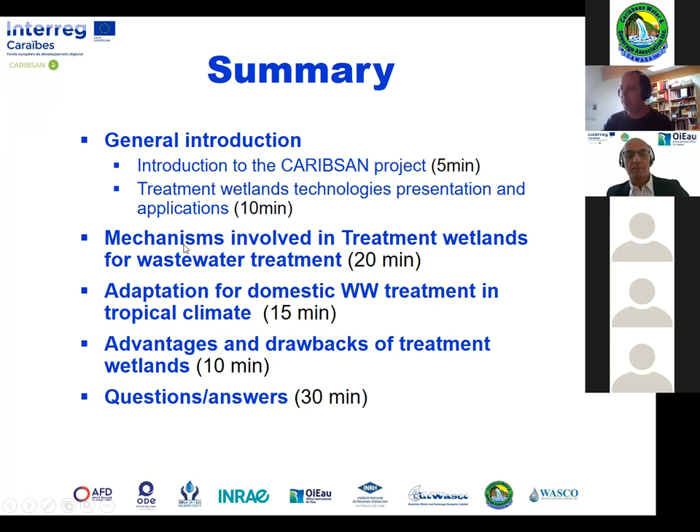We already had the introduction to the CARIBSAN project. The objectives of this webinar are to give you a general introduction to treatment wetlands, different kinds of technologies, and their applications. After, Joseph will present the main mechanisms involved in treatment wetlands. I will then come back on the adaptation of treatment wetlands for domestic wastewater in tropical climates, covering the big work we did in the French tropical islands. Joseph will finish with advantages and drawbacks of treatment wetlands, and we will have a 30-minute question session at the end.

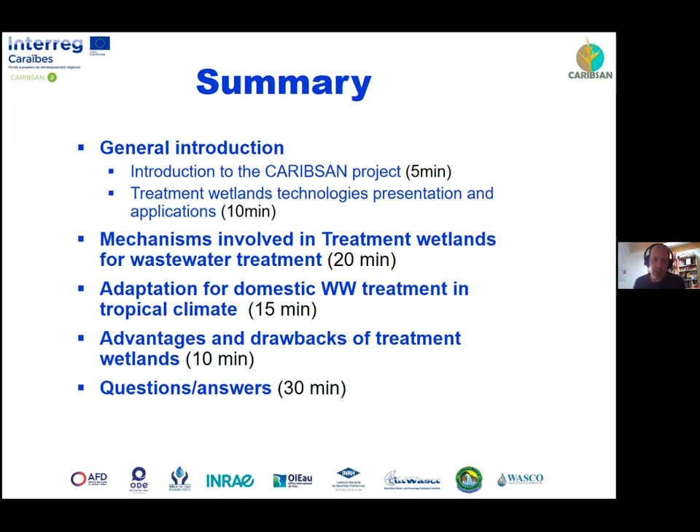So, general introduction about treatment wetland technologies. The first question is, what is a treatment wetland? It's an engineered wetland system, meaning it's not a natural wetland, which is designed to harness natural processes for the purpose of improving water quality. The key word in the sentence is improving water quality - there is an objective for treatment. It is technically and operationally simple, but it involves complex interactions between water, soil, plant, microorganisms, and the atmosphere.

During this webinar, we will not go too deep into the mechanisms involved, but if you are interested in the different kinds of applications, there is a free book available on the internet dedicated to treatment wetlands, with design examples and applications. Please feel free to download it and read the documents.

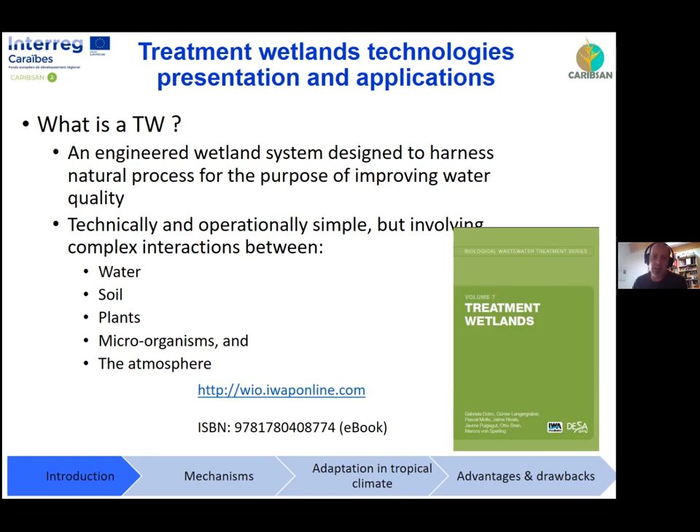Basically, when we are talking about treatment wetlands or constructed wetlands, that's the same term for the same technologies - we are focusing on treatment. We have two main technologies: what we call surface flow wetlands, which are basically pond systems with plants, and subsurface flow, where we use porous media in which the water will flow. That means there is no ponding water or flowing water on the surface - the water flows inside a porous media. We differentiate according to how the water goes through the system when we talk about subsurface flow wetlands.

Whether the water flows horizontally or vertically through the system, and according to the flow, we can have systems that are fully saturated or not, and flows that go downflow, upflow, or mixed - sometimes down, sometimes upflow. There is a lot of different kinds of implementation and design, and you can see at the bottom of the scheme there are many technologies. This was a first terminology made something like 10 years ago, and it has evolved a little bit.

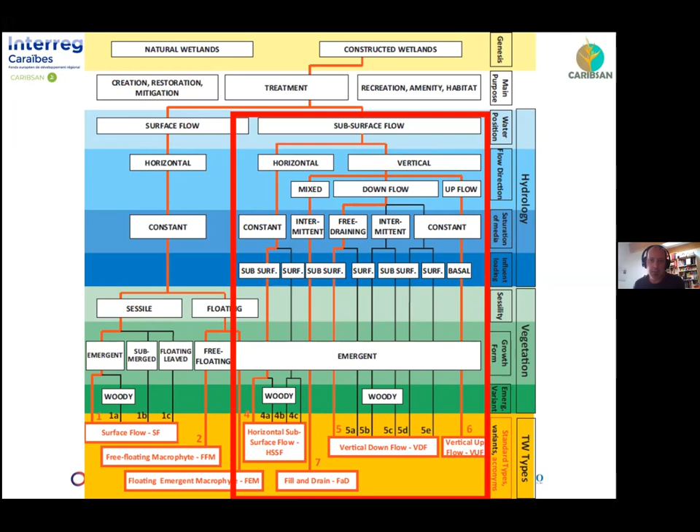Just to give you an idea about the number of treatment wetland systems that can exist - basically we have two. The main systems are horizontal flow, the one on the left, which is subsurface flow.

Yeah, there is no question. No, okay. So on the left - yeah, someone has his microphone on and I got some echoes. I don't know who it is. If you can, please, for the moment, put off your microphone.

Thank you. So on the left, you have what we call a subsurface flow treatment wetland, meaning there is a porous media in which the water flows horizontally within the system, and we saturate the system thanks to a pipe that allows us to adjust the level of water below the surface of the system. On the right, you have what we call a vertical flow system, which is fully drained at the bottom. When we apply water at the top of the system, the water flows vertically by gravity, and the system is not saturated.

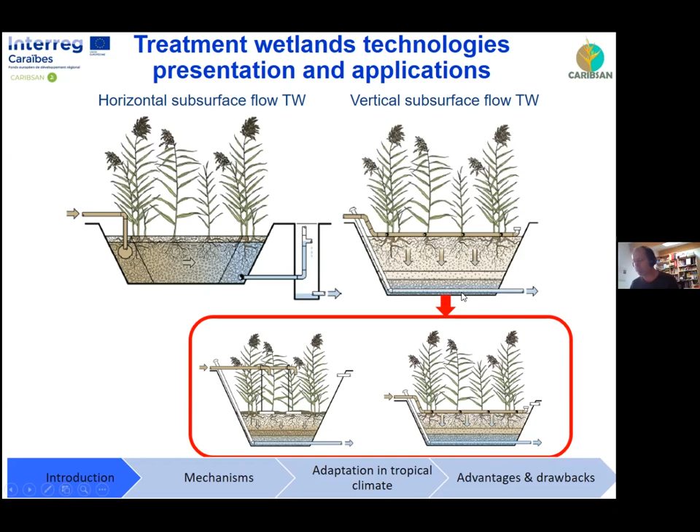For the vertical flow system, we can either apply raw wastewater without any pre-treatment, meaning treating the sludge and the water at the same time, or use vertical systems with different designs to treat pre-treated wastewater. There is also different evolution of the system, trying to mix both of the main configurations I just presented, horizontal flow and vertical flow.

Here you have a scheme of a vertical flow system, which is fed on top. The first part of the system is unsaturated, so we are promoting aerobic activity, and below there is a vertical flow saturated system. In this system, we try to implement two zones in which we will be able to develop different biological activity.

Another development that has been made over the past decade is trying to intensify the treatment wetland system a little bit. Here you can see two examples of vertical flow and horizontal flow systems, saturated with forced aeration. That means we mechanically blow air within the system to improve oxygen transfer.

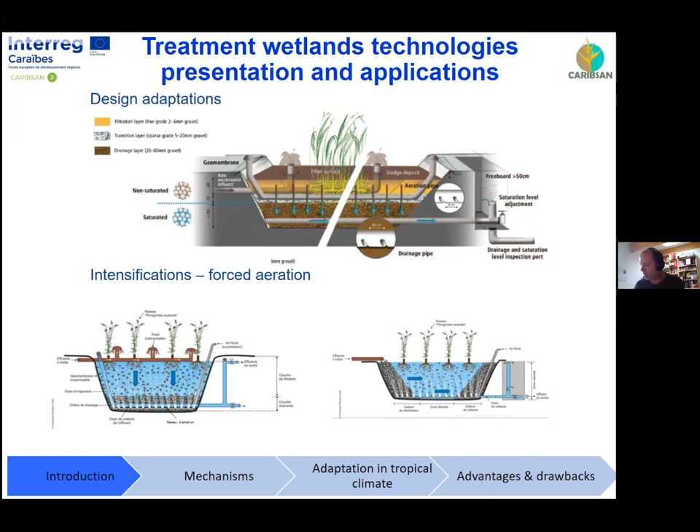Just a few rules to have in mind: when we want to design such a system, we need to adapt the surface and the media we use within the wetland system. For unsaturated systems, we use classical surface loads - that means how much water per square meter we can put per day, or how much pollutant per square meter we can put per day to reach a certain level of removal performance.

When we use saturated treatment wetlands, we use simplified models coming from chemical engineering to fit the retention time into the system. One thing we need to be aware of is to avoid any clogging of the media with time, and there are some rules we will discuss later to manage the clogging and ensure the system can operate over a long time perfectly.

The adaptation to climate is important as well, because biological activity will depend strongly on temperature. We have some rules to adapt the design of the systems according to climate. We will come back to this later.

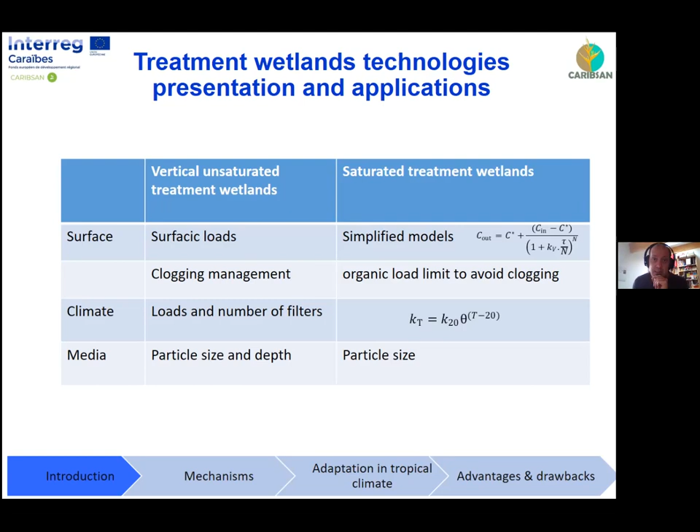This is just to give you an idea that the number of treatment chains we can build with wetland systems is huge. We have to adapt the design and which system we use according to the local context and the target for the outlet - that means which level of performance we want, for which application, whether we want to reuse the treated wastewater or just discharge into the water body.

We can also use recirculation between stages, or use specific materials as porous media to promote specific chemical reactions. So that was an overview of the treatment wetland family.

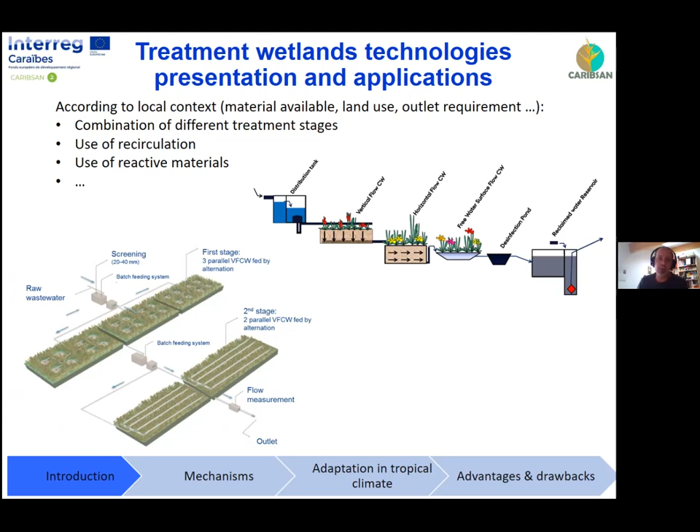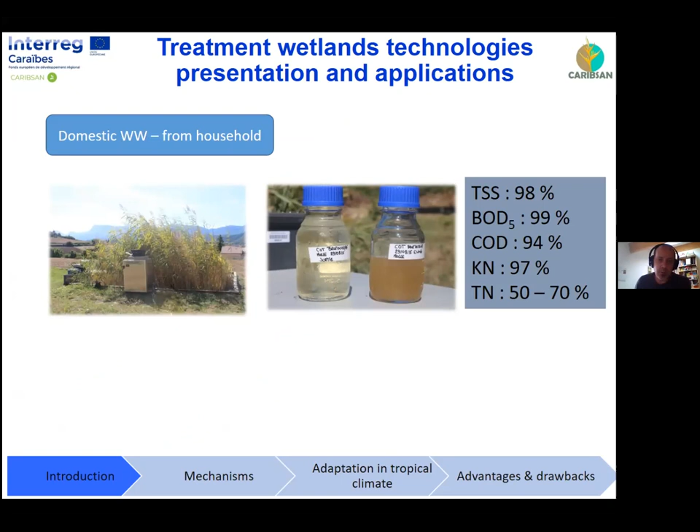I'd like to present some different kinds of applications now. What's interesting to us is the application for domestic wastewater - we can use such systems from household scale, meaning a treatment wetland in a house garden to treat wastewater from the house, but we can also use treatment wetlands for communities, up to big communities. The biggest treatment wetland in the world treating domestic wastewater from a community serves more than 25,000 people equivalent.

Another important thing is that you can adapt the shape of the design to try to reach an aesthetic aspect, as you can see here on the treatment wetlands in Thailand.

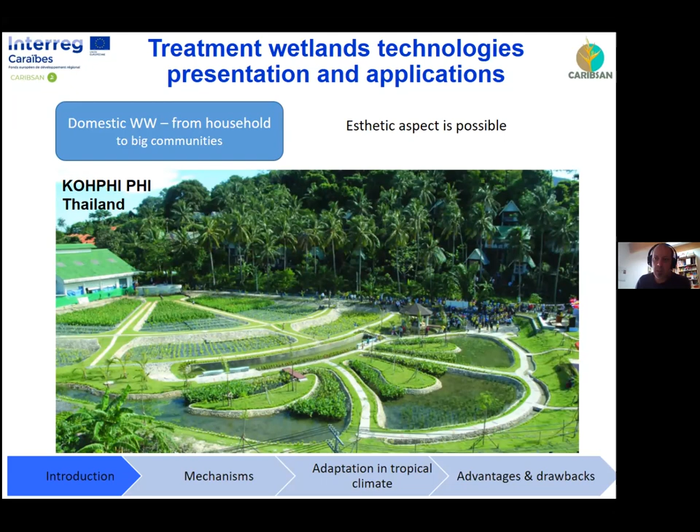Another possible application is to use treatment wetlands to treat sludge - that could be sludge from activated sludge. Here on the left you have a picture from a big activated sludge treatment system in Denmark, and in the background of the picture you can see the treatment wetlands designed to treat the exit sludge from the treatment plant.

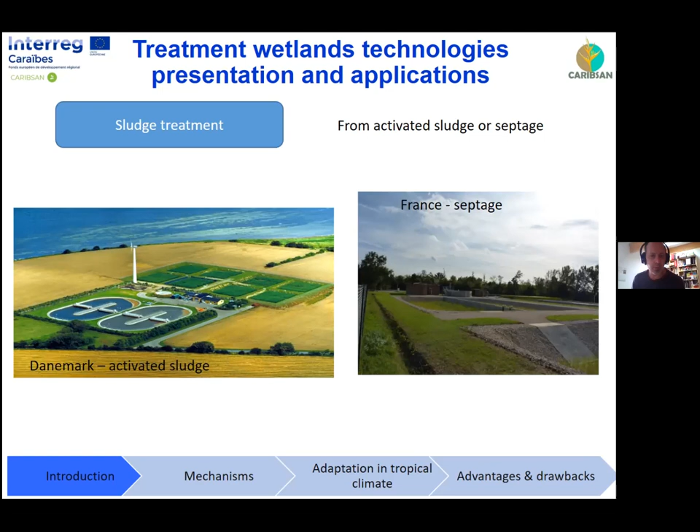You can also use treatment wetland to treat septage - when you have sludge coming from septic tanks, you can treat them on treatment wetland as well. The design and operation will be different than treating domestic wastewater, but you can achieve good performance. Here's a picture during construction, adapting the sludge treatment system for tropical climate - this was in Mayotte Island, for 5,000 PE.

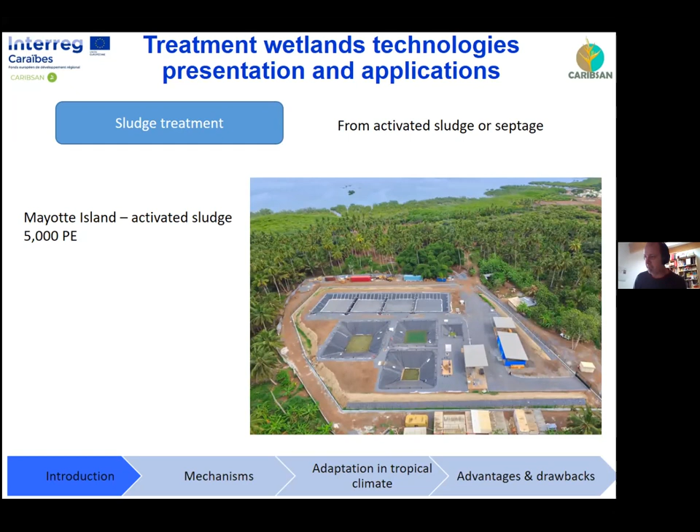Another possible application is to treat the overflow of combined sewers. During big events, you can have combined sewer overflow with a mix of rainwater and domestic wastewater that can impact the water body or environment, and you can treat this overflow locally with treatment wetland. Here's a picture of a system in France treating 1,500 cubic meters a day when it's overflowing. What's important is that we can ensure a specific outlet level in terms of pollutant concentrations.

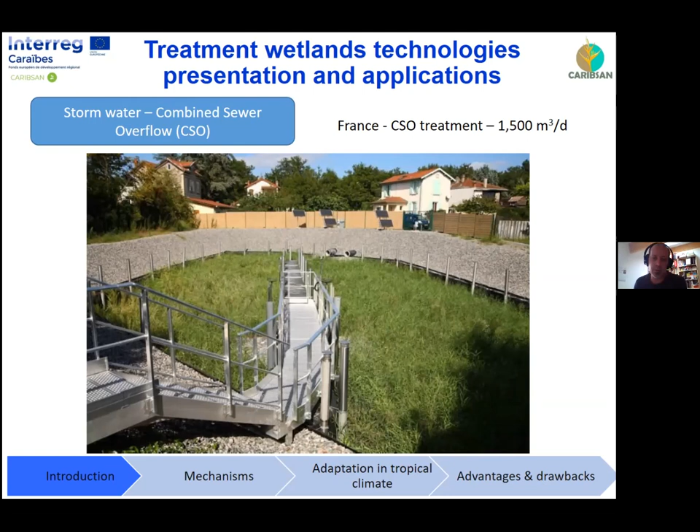Another application is for industrial or agro-food industries. This shows that it's possible to treat agro-food industry wastewater because it's easily biodegradable.

On the left, you have a picture of a treatment wetland treating rum distillery effluent in Martinique Island, 250 cubic meters per day during production days. On the right, in USA, it's an application showing that it's possible to treat effluent from chemical industry for specific compounds, here for methanol and benzene.

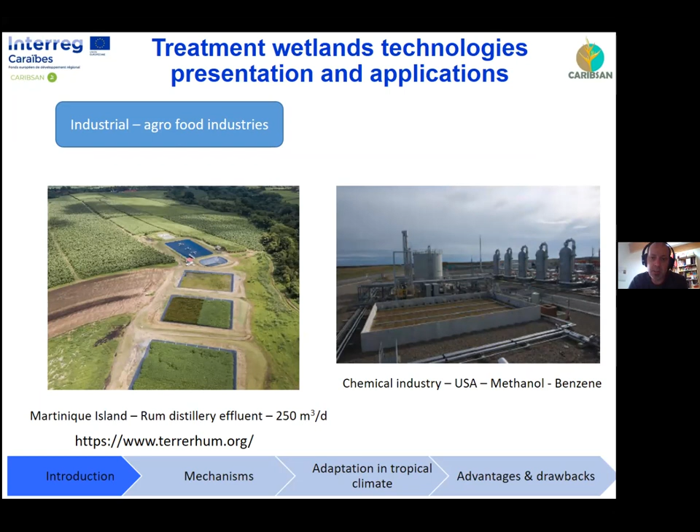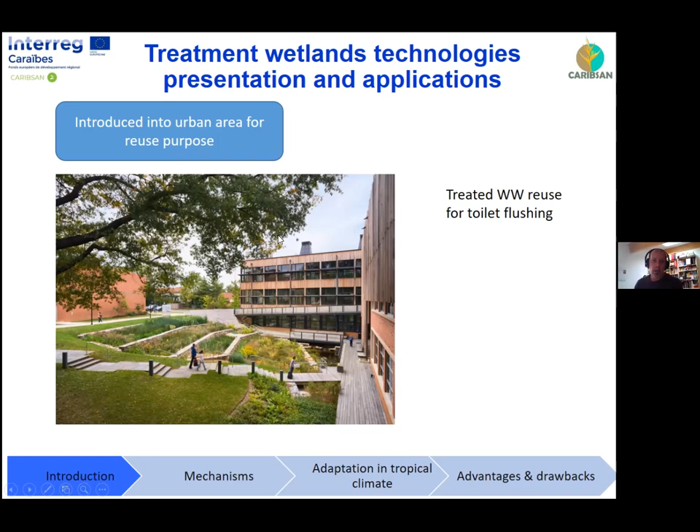My name is Joseph Pronost, and I am the training director at the International Office for Water, and also an expert related to wastewater treatment. I will present a little part of this global presentation about the mechanisms involved in constructed wetlands for wastewater treatment. Next slide, Pascal.

Here you have a scheme view of a classical wastewater treatment plant in metropolitan France, that is for mild climate, realized in the part of France included in Europe. From left to right, at first we have the inlet of the wastewater treatment plant, after a simple screening device, and after the counting and sampling of the wastewater, this raw wastewater goes inside the flushing tank.

The aim of this flushing tank is to have a sudden flow rate on a big volume which will go onto the filters—these are constructed filters. There is a first stage, usually in metropolitan France, with usually 3 filters in parallel.

By this way, we will feed one filter during 3.5 days, and the other 2 filters will have a sort of resting period during 1 week. After, we recover the treated water from the bottom of the filter. It will go inside a second flushing tank in order to supply the second stage of filters, where usually we have 2 filters in parallel.

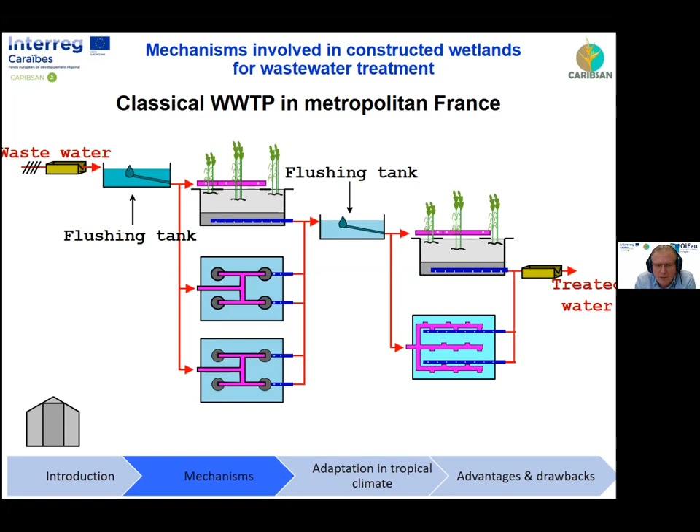As Pascal explained before, we usually use vertical filters. On top of the filters there's the inlet through some pipes, and after you go through a filter whose depth is roughly 80 centimeters. These are usually non-saturated filters, and at the bottom there are drainage pipes, with pipes for aeration connected alongside the drainage pipes. Through this aeration system and through the sand itself between 2 batches, there is some air coming in, giving us a sort of guarantee to obtain an aerobic treatment.

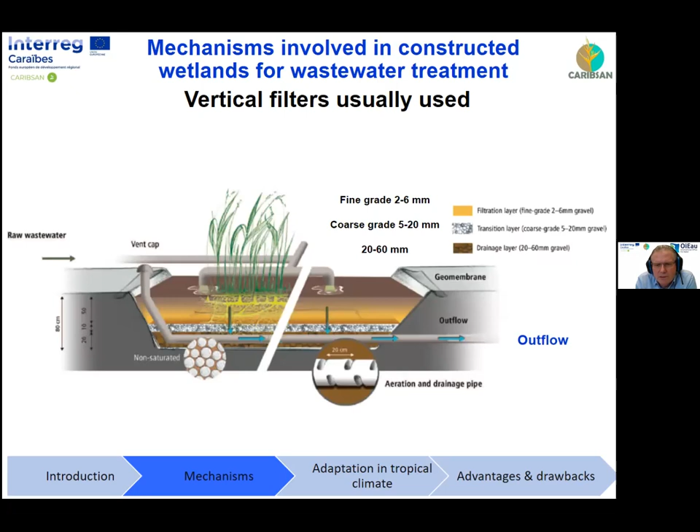You have some global values about the granulometry, the grades of material installed inside this type of filter. At first, you have a filtration layer whose grade is between 2 to 6 millimeters. Just under this filtration layer, there is a transition layer, usually with a grade between 5 to 20 millimeters. At the bottom, there is a drainage layer, with granulometry between 20 to 60 millimeters. All these filters are watertight, with a geomembrane for watertightness.

Thank you, next slide. About the mechanism, you have to understand that the phenomena are very complex. In orange color, you see these mechanisms: some hydrodynamic phenomena, some biological activity, some plant activity, and some gas transfer phenomena. Then it is very important to obtain an equilibrium between these processes.

If there is too much biological activity in comparison with the porosity, you may have some malfunctions. So this notion of equilibrium is very important. It's necessary to adapt the design to external factors such as the climate. For example, for tropical areas, you have to take into account the temperature.

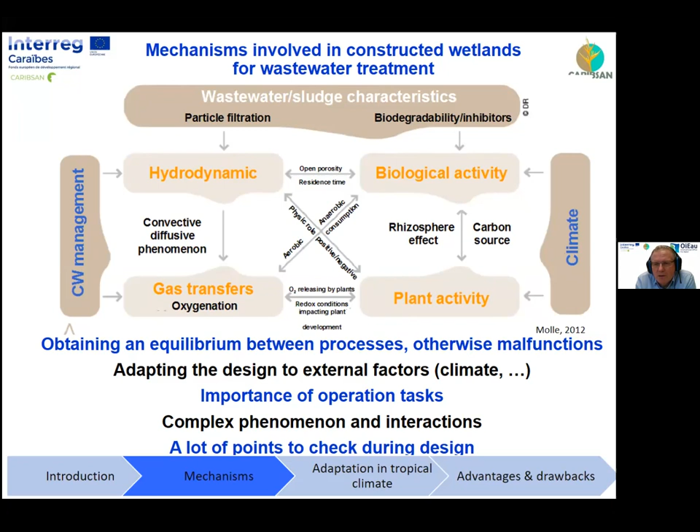The operation tasks on constructed wetlands management are important. These operation tasks are not complex, but it's very important to ensure them in order to maintain good equilibrium, since there are complex phenomena of interaction. Because this is a complex type of treatment, there are many points to check during the design. So this type of treatment seems very simple, but in fact it is complex according to the design. You have many points to check in order to ensure good reliability of the treatment.

Next slide, Pascal, thank you. Here you see the evolution of vegetal growth. This is a typical configuration in metropolitan France, in Europe. In the first pictures you see the first stage of filters, of the 3 filters, with the feeding points at the surface of the fine gravels. In the second plan view you discover the second stage of filters.

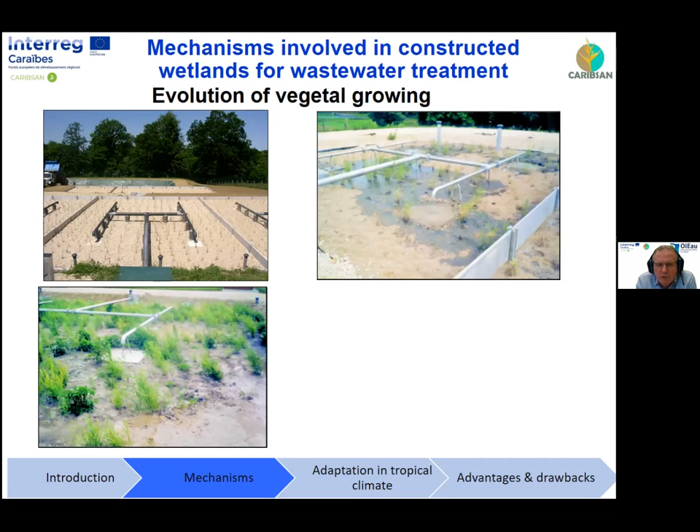During the first year, you have a little growth of vegetal. In metropolitan France we usually use reeds, quite always reeds. During the first year you obtain the growth of these reeds, but you have to take care especially about the growth of weeds, and you have to clear the filters from these weeds. After several years you obtain the aspect of these filters shown in the last picture. You see that the development of the reeds is very good, and the height of these reeds may reach, for example, 2 meters.

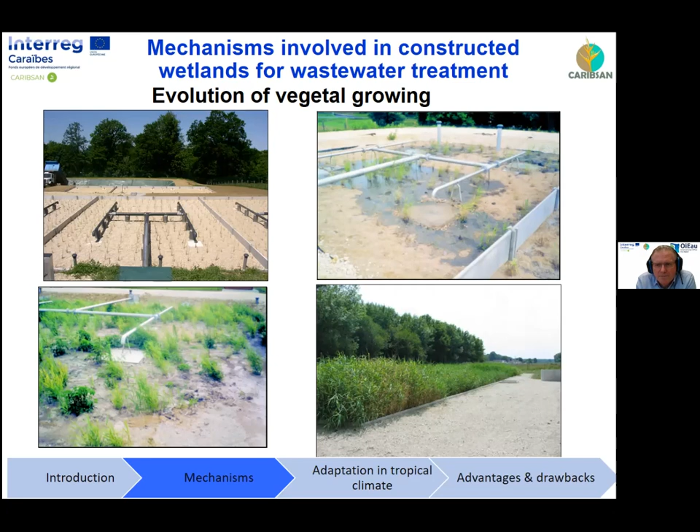Next slide, next, yes. Through this specific technology of constructed filters, constructed wetlands, it's very important to have a batch feeding mode. During some times of the day, we feed the filters. If you could click, Pascal, thank you.

During the feeding phases, you feed the filters with a high flow rate in order to obtain a good repartition by submersion, and with a big volume too. Because you obtain good submersion, you improve the retention time and develop a good active, horizontal active surface. During these feeding phases, you obtain biofilm development, and the bacteria will be very active on these gravels and sands.

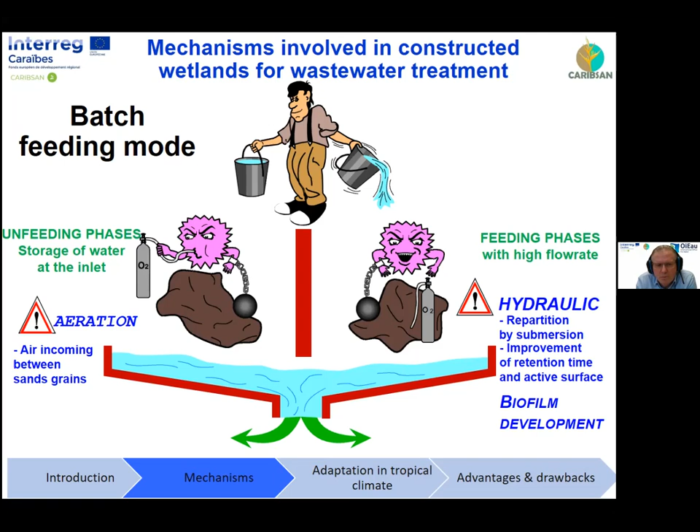During some other periods of the day there are unfeeding phases, meaning you store the raw wastewater at the inlet of the filter in the batch tanks. During these unfeeding phases, air will come between the sand grains and the gravel grains, and you obtain an aeration phenomenon. So our design is mainly based on the aerobic phenomenon, usually as the first priority, but it may be complemented by some other possibilities you will see later.

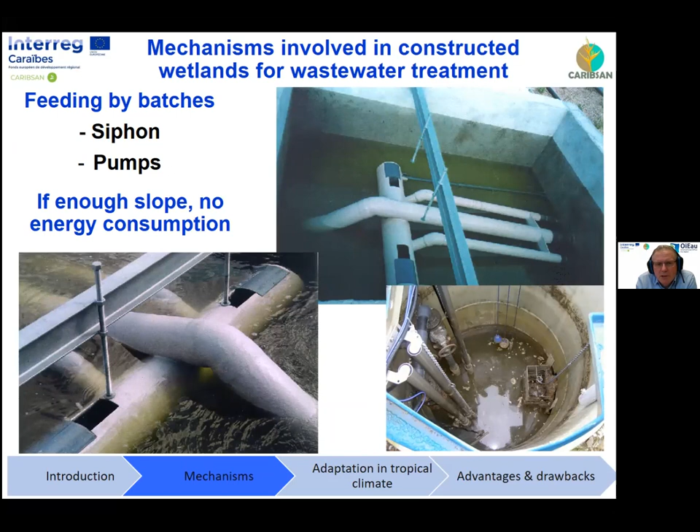Next slide, Pascal. Here you have some views of typical feeding by batches. Usually we use siphons; this way there is no need for energy, and if you have enough slope, you obtain treatment without energy consumption. But if the slope of the ground is not enough, it's possible to use a pumping station and realize batches by pumps. Next slide, thank you.

As a summary, the key points of the treatment: these are generally vertical flows, mainly vertical. There is feeding by batches in order to obtain homogeneous water distribution at the surface. Between 2 batches there is oxygen transfer. We obtain submersion of a few centimeters, 1, 2, 3, up to 5 maximum, at each batch. This is an aerobic treatment. We have at the inlet screened raw effluent, and there are no primary treatments. We use specific material with very precise characteristics of permeability, granularity and so on, such as gravels and sands. The filters are in parallel, with alternating periods of feeding, 3.5 days, and resting, 3.5 to 7 days. This organization helps prevent the clogging of the filters. Next slide.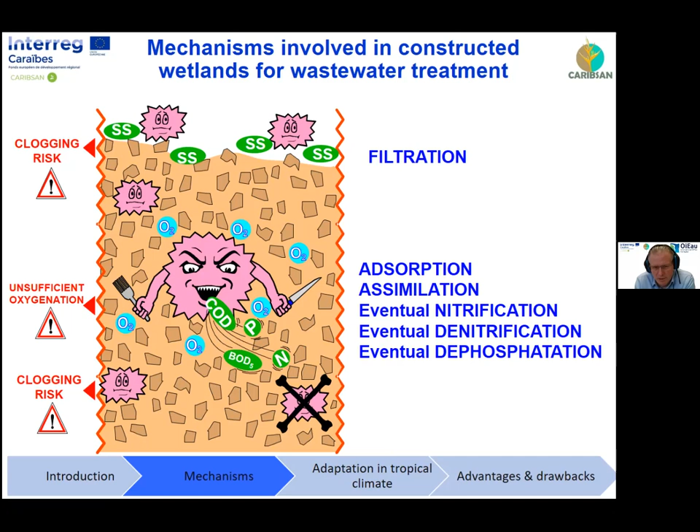As said before, the fine gravels and the coarse sand will ensure the filtration process. By this way, you will remove the suspended solids. The biofilm and the bacteria will ensure the adsorption, and you will adsorb some fine suspended solids, BOD5, COD, ammonium, and especially the BOD5 and COD in fine suspended solids.

The biofilm and the bacteria will ensure the aerobic assimilation in the aim to remove quite well the BOD5, the COD, and a part of the nitrogen and the phosphorus.

If you have 2 stages in series, it's possible to obtain good nitrification in the aim to remove the Kjeldahl nitrogen and the ammonium, because the ammonium is included inside the Kjeldahl nitrogen.

And if you create some anoxic zone, for example some saturated zone, and if there is enough organic carbon inside this anoxic zone, it's possible to obtain some denitrification phenomenon in the aim to remove the nitrates.

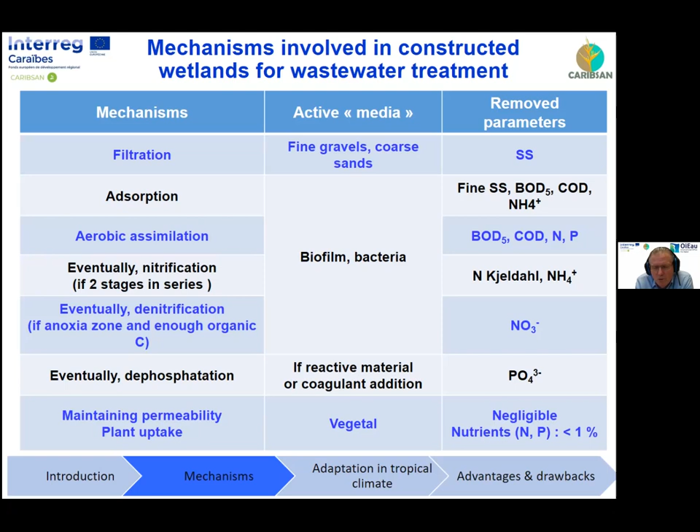About the risks that I did mention before, we take care about this risk during the design. For example, about the clogging risk at the surface, so we design some extended treatment. Thus, the repartition of the inlet suspended solid load is done on a big surface, and then you decrease this clogging risk at the surface, because these are vertical flows that we use mainly.

The main role of the vegetal is to maintain the permeability, because the vegetal stems will form some holes inside the sludge at the surface. By this way, they will ensure this role to maintain the permeability.

In the aim to prevent the clogging risk in depth, it's important to design all the wastewater treatment plant with some resting period, for example 1 week of resting period, of non-feeding period. And then during this resting period, we obtain a partial aerobic mineralization of the biofilm, and then we improve again the permeability in the aim to feed again the filters with the wastewater.

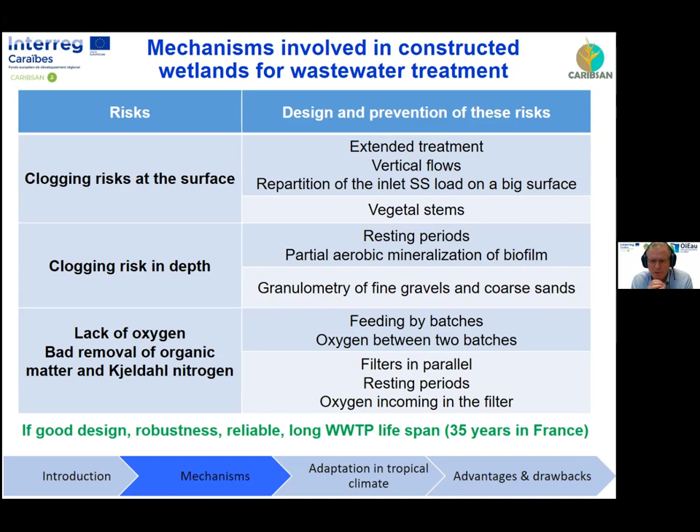So if the design is done according to these prevention rules, we obtain a good design, a good robustness. This type of wastewater treatment plant is reliable. And for example, the lifespan of this type of wastewater treatment plant in France may be, for example, 35 years in metropolitan France. Next slide.

So this is only a picture to show you the holes around the stems of the reeds, in the aim to maintain the permeability at the surface.

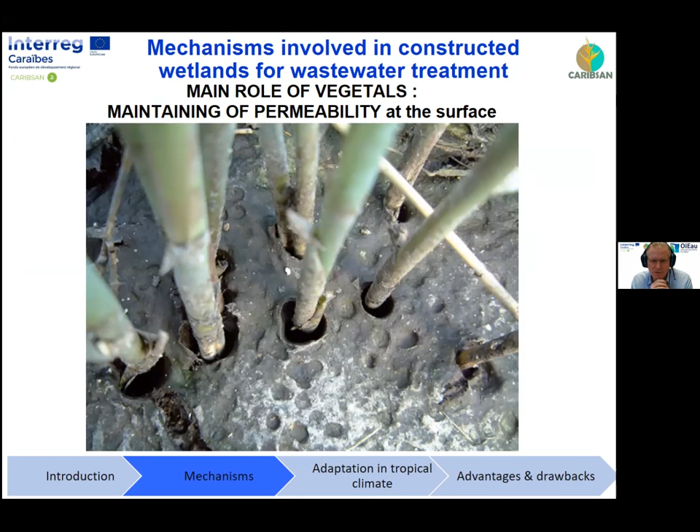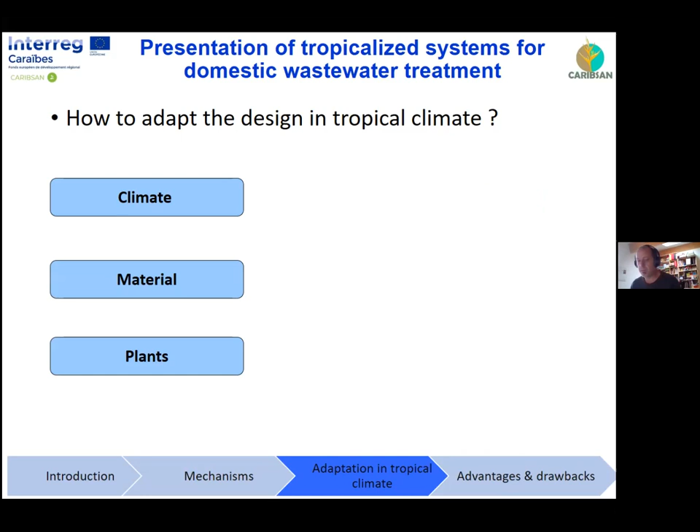Thank you, Joseph. So I will go on presenting the adaptation of treatment wetlands for tropical climates. One of the first questions we had when we wanted to adapt the system was how to adapt the design, because thanks to the climate, we could promote higher biological activity. So the question was how to reduce the surface of the system.

Is it by reducing the surface of each cell or the number of filters? Which material to use? Can we work without sand, because sand is sometimes difficult to find locally? So if we could implement a system without using sand, only gravel,

it would be really interesting for the tropical islands. There was also a question about the volcanic material we can find on the islands, and how suitable they are to be used, and what impact on treatment performance such material could produce. And of course the other question was about plants, because Phragmites australis, which we use in France and mainly all of Europe, is not present in many tropical islands, or if present, is considered an invasive plant. So it was not possible to use them, and there was a necessity to conduct work as well on the choice of plants.

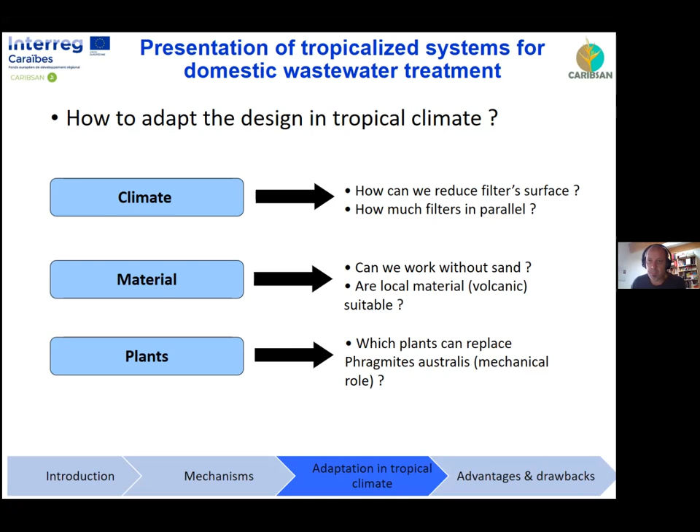So what we did for the adaptation of the number of filters: the idea was to work with a first vertical flow system able to treat raw sewage without any pre-treatment, to manage sludge and treat wastewater using only 2 filters in parallel, but not reducing the surface of each cell compared to what we do in temperate climates. The idea was to maintain the robustness of the system to accept hydraulic overload, because in tropical climate there is a lot of rain.

So this interesting feature of hydraulic overload acceptance had to be maintained in tropical climate. We decided to only choose 2 filters in parallel, because the main role of alternating feeding and resting periods with multiple filters is to manage clogging. As temperatures are higher in tropical climates, biological activity is higher as well, so we can mineralize the organic deposits formed at the surface more easily.

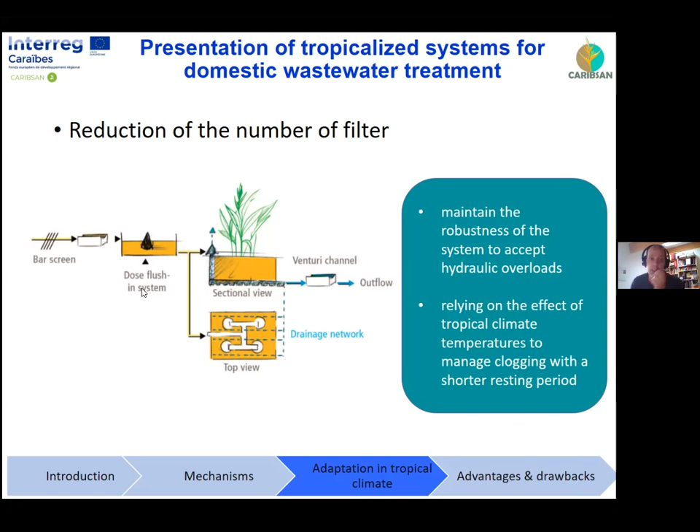Then, considering the choice of plants, we started from a selection based on the characteristics we wanted, looking at the literature and discussing with local experts on tropical plants about which plants could be used or not. We then selected 21 species to be tested in batch experiments, to test their robustness to specific conditions like anaerobic and anoxic stress, when anaerobic conditions are too long or too high, or water stress as well.

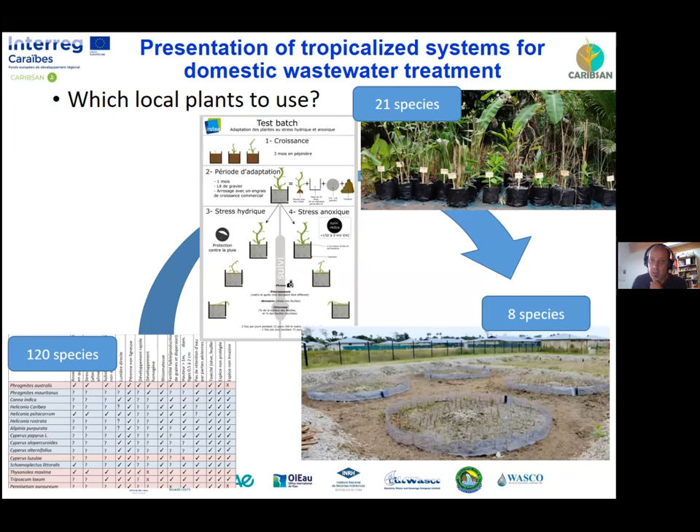We then selected 8 species to be tested in different full-scale systems at different organic and hydraulic loads. Thanks to that, we were able to define different plants that could be used in tropical climates for wastewater treatment systems. Here you have an example of 3 of them: Heliconia psittacorum, Canna indica, and Cyperus alternifolius. One of the interests is that when using, for example, Heliconia, we have an interesting aesthetic aspect as well, thanks to the flowers.

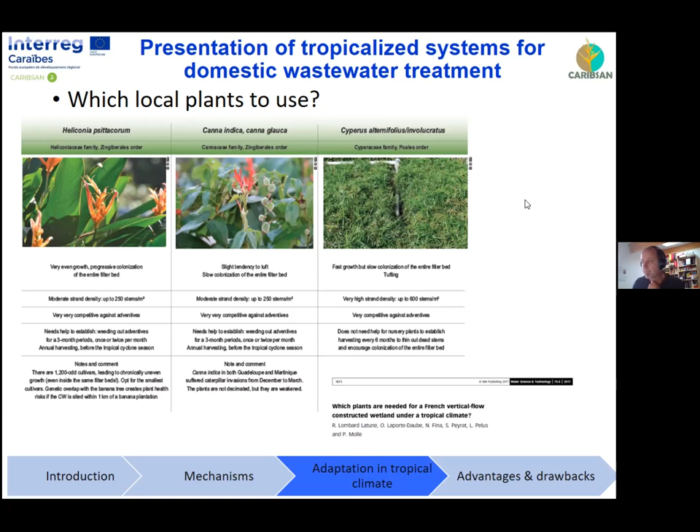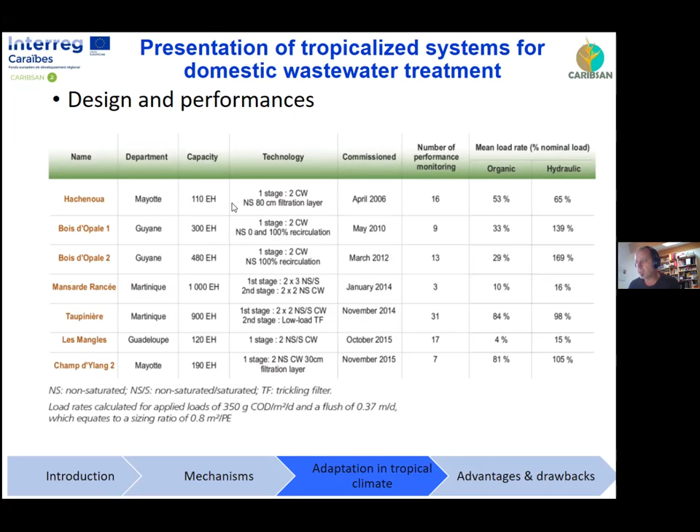Concerning the different designs and systems we wanted to test in tropical climates, we worked on 7 full-scale systems in different French overseas territories. 4 treatment plants used a first vertical flow system, unsaturated, and here we tested different filtration layer depths, with or without recirculation, to see according to the design which performance we could reach.

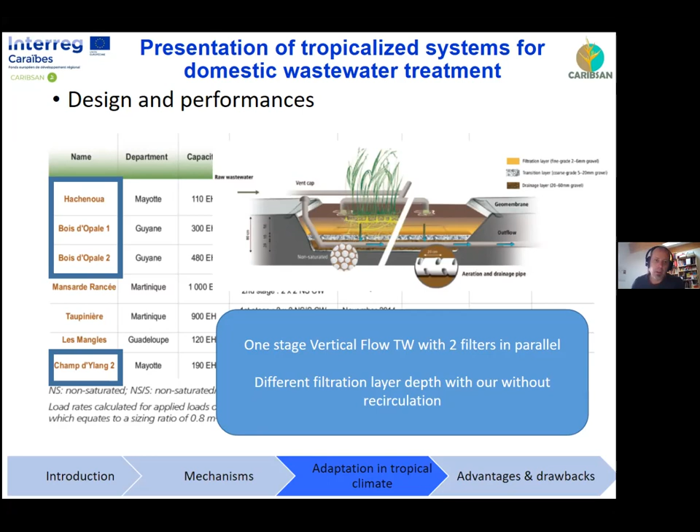On 3 other plants for the first stage, we tested the vertical flow system with the first layer unsaturated and the second layer saturated. The idea was to see how we could improve the performance of the first stage to be able to work with only one stage and stay compact in terms of footprint. So here as well we tested the depth of the different layers, unsaturated and saturated, and with or without recirculation.

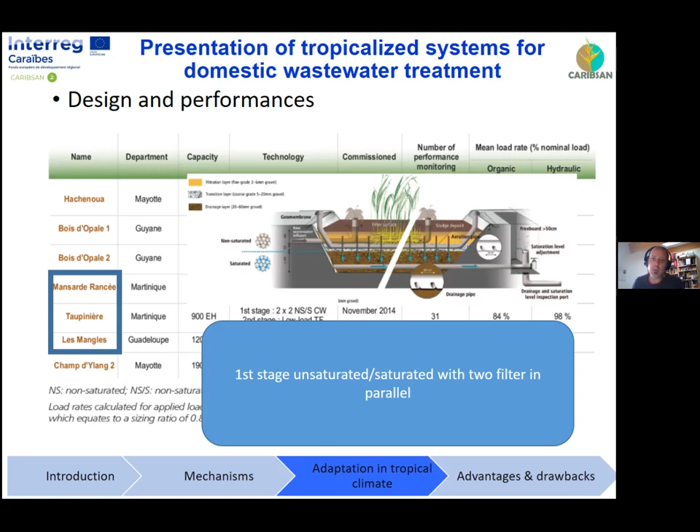And as well, on a specific plant, we used a second stage, a very simple trickling filter, to finish nitrification and improve total nitrogen removal while staying compact, because the total surface of the filters and the trickling filter was below 1 square meter per PE.

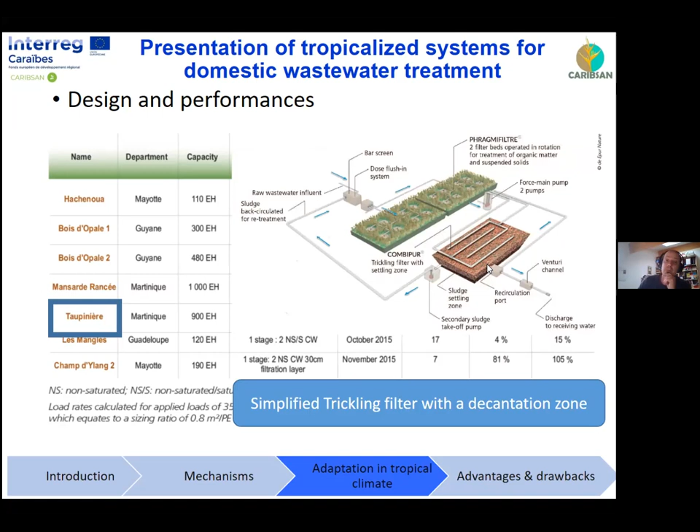Thanks to that, we observed that the vertical flow system had performance similar to temperate climate for COD, BOD, and TSS, meaning quite good, but better nitrification thanks to the climate. It was possible to reach almost complete nitrification using only one stage with 80 centimeters of 2-6 millimeter gravel and recirculation. Here you have an example of the outlet quality in terms of concentration for COD, BOD, TSS, and total Kjeldahl nitrogen.

Here it's for 0% recirculation, or less than, let's say, 125%, or more than 125% recirculation. And here you have, for the same conditions, the removal rates. You can see that we can improve performance thanks to recirculation and reach very low levels of nitrogen at the outlet. If you're interested, there is a paper that presents these results in more detail.

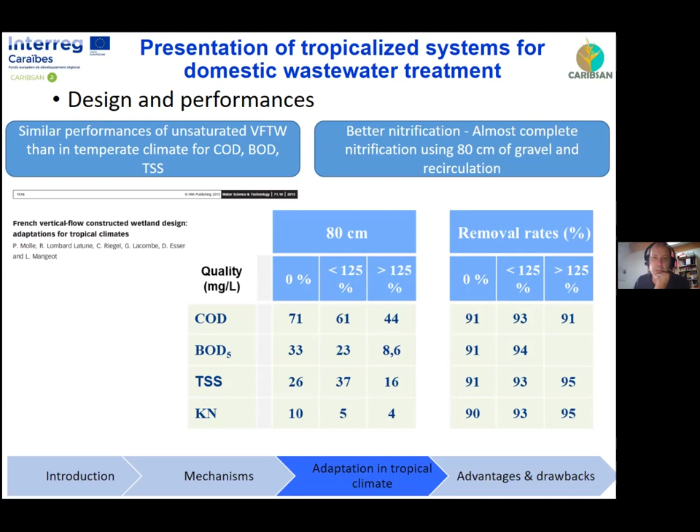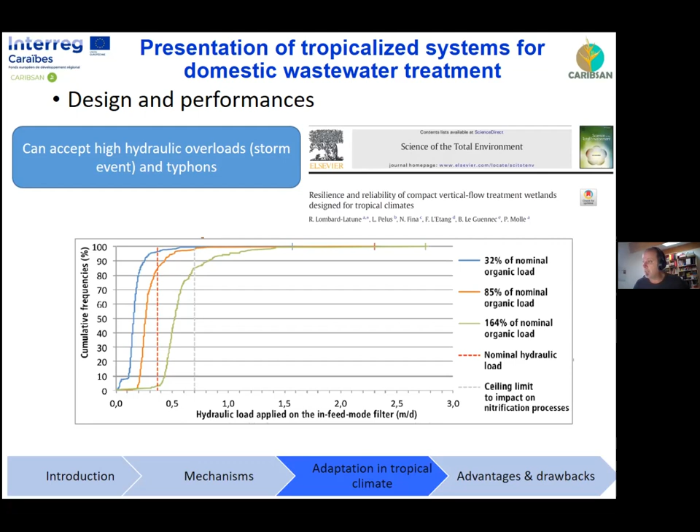Thanks to all this monitoring done during many years on different systems, we are able to propose different designs according to specific constraints - whether we want to work with or without electricity, if we have combined sewer or not, what are the limits in terms of load, if we have intermittent activities like a touristic area with huge variation of load, and the footprint and minimum concentration we can respect. That guarantees, not the average, in terms of performance or outlet concentration for each parameter. The last column is whether we can put UV disinfection at the end to reach a quality able to promote reuse or just discharge in a bathing area.

What we observe is that we can have a compact system that reaches classical, not very stringent, but classical performances we expect from a system. But we can go deeper with more stages, sometimes increasing the footprint, and going until high performances - quite interesting performances as well for total nitrogen removal if it's targeted.

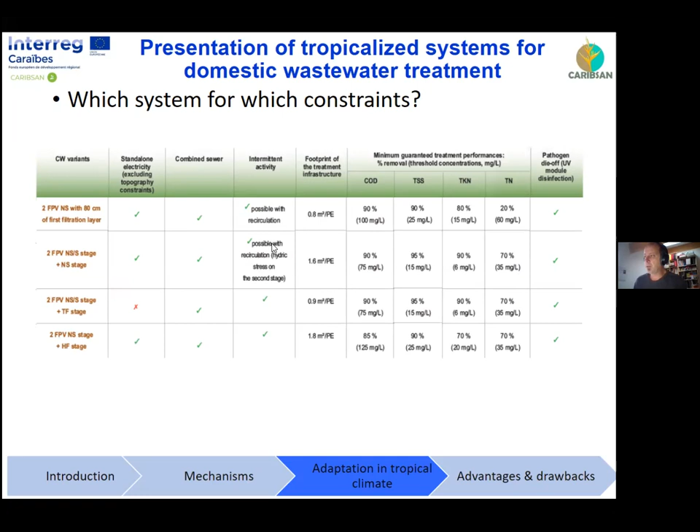The other observation we did is comparing the system to classical treatment systems. Here I will present some percentile values of outlet concentrations and performances. Here you have a curve with different systems monitored for activated sludge, rotating biological contactor, pond system in blue, and vertical flow wetlands. For example, if I want to respect 35 milligrams per liter of BOD at the outlet, I can look at the line of each process of each technology I want to select.

For example, for activated sludge and rotating biological contactor, I can see that I will respect this value 75%, a little bit less, of the time. And if I go to the vertical flow system, for the same value, it will be about 93% of the time. So it allows us to compare the different technologies in terms of robustness in tropical conditions.

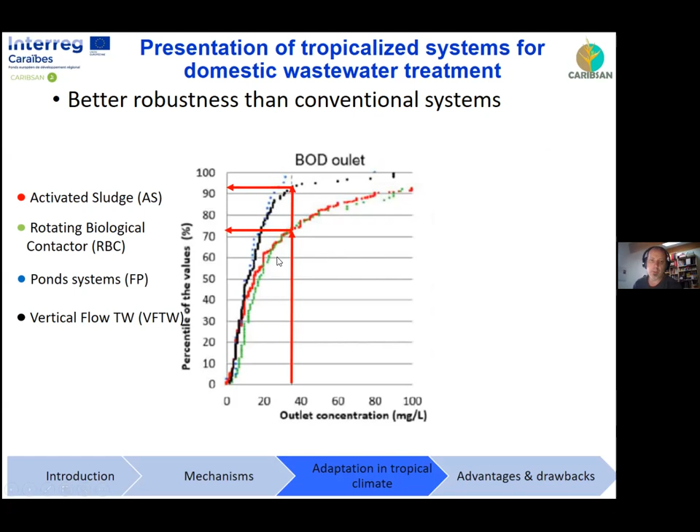What we can see for BOD, COD, TSS, and nitrification is that vertical flow systems are always better than activated sludge and rotating biological contactor. This survey was done for treatment systems below 2000 PE. Of course, when you have big activated sludge plants, there are always people maintaining the system and you can better control performances. But for small size, below 2000 PE, it's what we observed here - that vertical flow systems are finally more resilient and more robust than activated sludge and rotating biological contactor.

This is mainly because for activated sludge, each time there is a storm event, you have some losses of sludge. This will impact COD and TSS at the outlet, but also, a loss of sludge means you need to recover nitrifying bacteria again over time to recover the nitrification performance. So we observe that it affects the nitrification as well. For rotating biological contactors, the main issue is also the separation, which is sensitive to storm events - separation of sludge and treated wastewater.

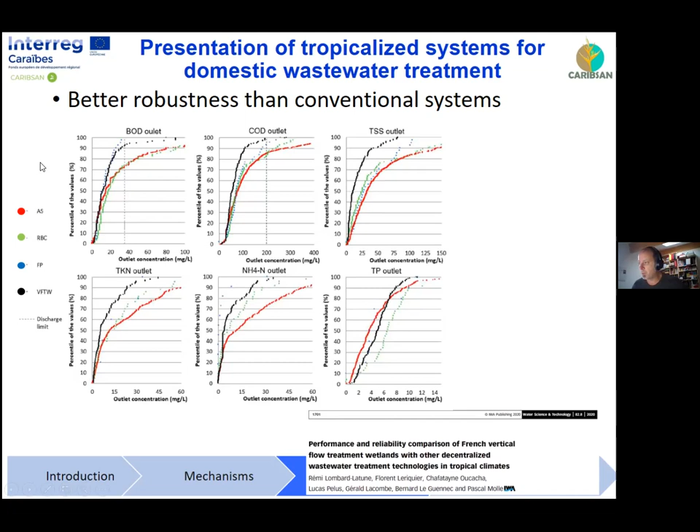Just to show you, there is as well a guideline that we did for the adaptation of treatment wetlands in tropical climates, which you can find freely on ResearchGate - do not hesitate to go there and download it. On the right is a picture of a treatment system in Martinique Islands. You have new buildings that have been built, and close by, on the bottom right, you have the treatment system for all these buildings. You can see that it's quite compact and well integrated into the landscape.

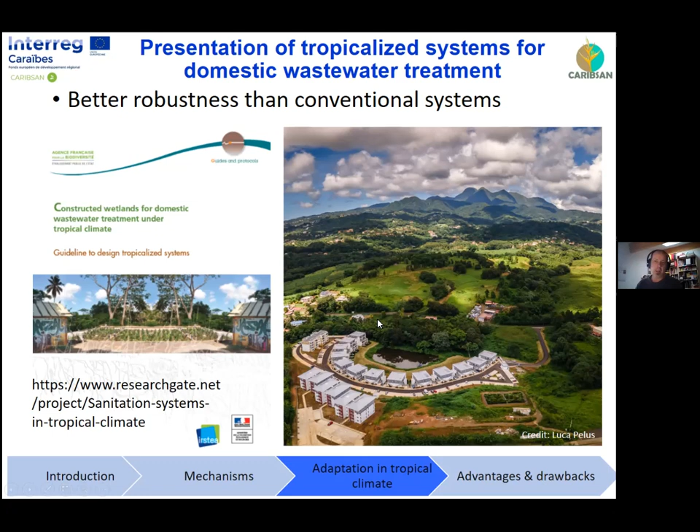So I will present you the advantages and the drawbacks of constructed wetlands according to the type of configurations that we did present to you before.

The first drawback of constructed wetlands in general is the required surface for an extended treatment. This required surface is quite high, but as Pascal did explain to you, it is possible to imagine some more compact units with a used surface of filter equal to or less than 1 meter square per population equivalent.

The second drawback of this type of system is the annual cutting of vegetal, and you need to remove this vegetal from the filters. This is especially a big drawback if you have a high surface of filters of constructed wetlands.

Especially during the first years, you have to remove the weeds. And of course, if you have a big surface of constructed wetlands, this is a big work. There is some weed proliferation if you are in the case of too low hydraulic load.

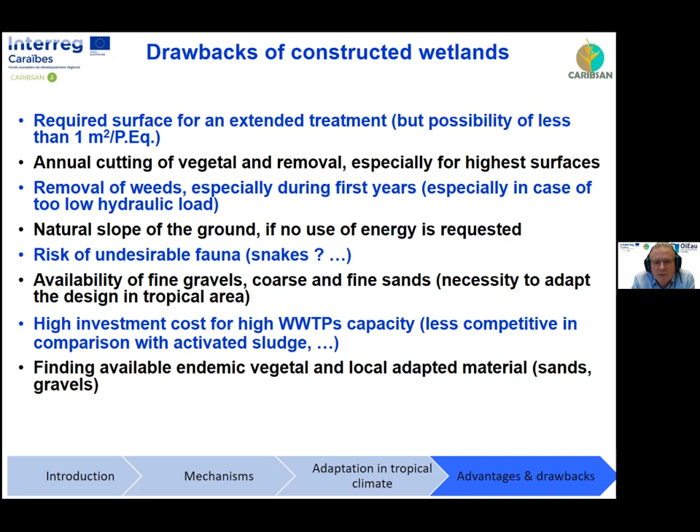Next slide. But there are, of course, many advantages of this type of constructed wetlands. At first, the good removal of suspended solids.

It's easy to reach some suspended solid content less than 15 to 50 milligrams per liter, according to the type of design that you will implement.

We have a good removal of organic matter too. The BOD5 is often less than 25 milligrams per liter, and the COD content may be less than 75 to 125 milligrams per liter, according to the efficiency and the quality of treated wastewater.

It's possible to obtain some nitrification, and thus you will reach some Kjeldahl nitrogen content less than 6 or less than 40, according to the type of design that you will implement.

It's possible to have a partial denitrification with a total nitrogen less than 35 milligrams per liter at the outlet. And you could also have dephosphatation, with a phosphorus content less than 2 milligrams of phosphorus per liter.

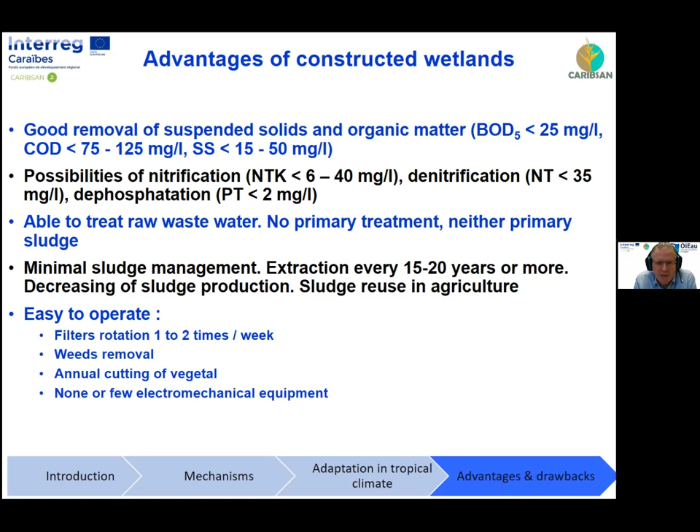As there is the possibility to have some wastewater treatment plants without electromechanical devices, the energy consumption will be equal to zero or very low in comparison with other processes. As Pascal explained before, it's possible to accept some very high hydraulic loads, and even high organic load variations, and this is often the case for small wastewater treatment plants.

This is also a good advantage, that this type of wetland is included inside nature-based solutions. We are now able to find some endemic vegetation for tropical climates, so we have the solution about the type of vegetation which will be well adapted.

As Pascal presented to you, it's possible to treat other types of wastewater - agricultural, industrial, rainwater - but even sludge. I discussed a drawback about the high investment cost when the size of the wastewater treatment plant is high, but in fact when the size is low, we obtain lower investment costs in comparison to other treatments, especially compared to the activated sludge process. In all cases, low or high capacity, the operation costs are lower.